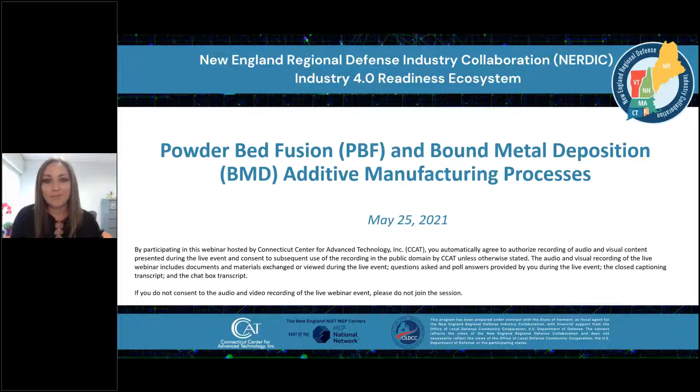So today we have a really great featured speaker, which culminates our four-part series focused on additive manufacturing. Today I'll go through our agenda, which you see here. We started with generative design for additive a few weeks ago, and here we are today to talk about Powderbed Fusion and Bound Metal Deposition from the team at the Center for Additive Metals, University of Maine, their leadership there, as well as the Vermont Manufacturing Collaborative at Vermont Technical College. Excited to also have a graduate student, a part of that technical team from the University of Maine, to present.

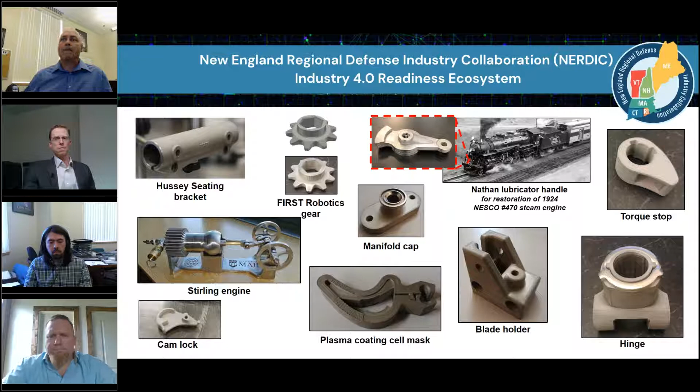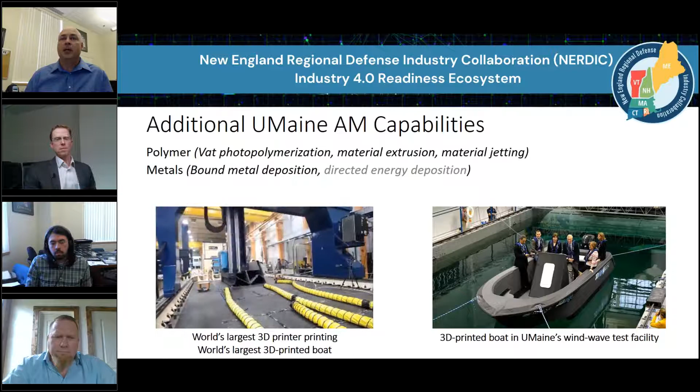Ben? Yeah, then I'll turn it over to Christopher Paulk from the Vermont Technical College, and he'll tell you a little bit about what they're up to in their process.

Thanks, John, appreciate it. Good afternoon everybody, my name is Christopher Paulk, I'm with the Vermont Manufacturing Collaborative. I'm currently serving as the executive director interim for Vermont Technical College, overseeing this project.

The Vermont Manufacturing Collaborative was a joint project between higher education, the DoD - the Department of Defense, the Vermont MEP which is VMEC, local industry partnerships, and our economic development offices. The idea behind it was to stand up an advanced manufacturing center focused at the Randolph Center campus, with an additive focus that would bring in post-processing technologies and essentially try to build bridges across the industrial skills gaps the DoD is seeing within their supply chains.

We'll have an initial focus on additive manufacturing, and we'll basically put in place all kinds of post-processing technologies to support that kind of technology. The goals from this entire program are really to engage students in 3D printing platforms and all the skill sets that support that, from CNC machining, CAD/CAM, QA, QC, metrology - you guys can kind of read that there.

Also looking at developing and enhancing industry partnerships, internships, and continuing education programs and opportunities that we can have, as well as trying to become a hub, if you will, within the New England region for all of our partnerships within universities, colleges, and industry, where they can utilize the facilities, curriculum, and expertise to really try to provide multiple pathways back to manufacturing.

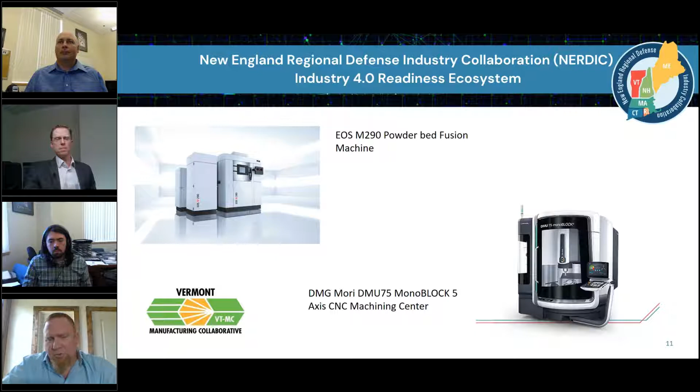Some of the equipment going into this place, we've already purchased an EOS M290 Powder Bed Fusion machine, which is going to be our big guy, as well as a DMU 75 monoblock. This is a DMG Mori unit, a 5-axis CNC machining center. I call this my Ferrari. It's a big, beautiful 5-axis machining center that will do all the post-processing for us as well.

Next thing we've looked at, we've also purchased a smaller EOS M100 machine to get a little more throughput with it, as far as training students and stuff like that, as well as we're doing CT scanning. We've got all kinds of binder jet stuff we're looking at as well, a whole assortment of smaller polymer machines, and a lot of metrology equipment and microscopes going into this place.

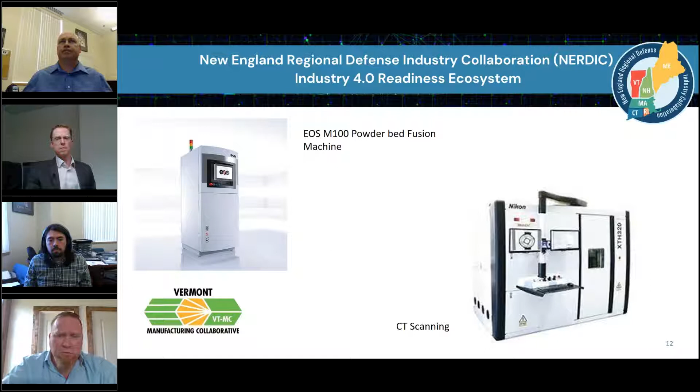So we'll basically have a complete additive center, really accessible for the entire region to utilize, especially with this partnership with NERDIC and CCAT and everybody else. It'll be a great opportunity for everybody, a great platform to start training people on and to use for any kind of technology development you'd like to have. Thank you for letting us have a moment to show you what we're doing in Vermont. And with that, I'll turn it over to Brett.

Thank you, Chris. Next I want to talk about the value drivers and market size for additive manufacturing. Hopefully this is a review for many of us, but just to see where we are.

Some of the classic case examples include the GE LEAP engine. This particular engine is quite exciting. The fuel nozzle, in which they took 20 parts and reduced it down to 1, and they were able to extend the life due to the ability to add conformal cooling.

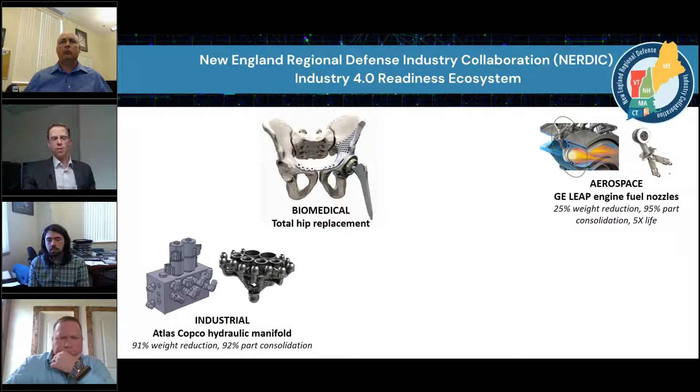More examples include biomedical examples. There are industrial examples of additive manufacturing of metals. In this case, a 91% weight reduction at the end of a robotic arm, thus leading to faster cycle times. Quite exciting example, non-metal, but in footwear. Can you tailor footwear to the application, such as a second baseman requires a far different kind of response on their feet than a pitcher might require.

There's a very famous example of the nacelle hinges for the Airbus A320, in which we go from a kind of welded type example in the back left, and towards the front right, we get to topology optimized additive manufacturing type of shapes.

An exciting example of additive metal is when we start looking at conformal cooling and the placement of cooling paths within the circuit. So here we have the exterior of the part, and the blue lines in the right image represent the cooling path. These cooling paths are feasible because of additive, and you're able to place the cooling path wherever it's most needed.

As a last example, we can see mass customization. It's another advantage of additive. In this case, BMW, it's a BMW i8 Roadster part. BMW has built more than 1 million additive parts between 2010 and 2019.

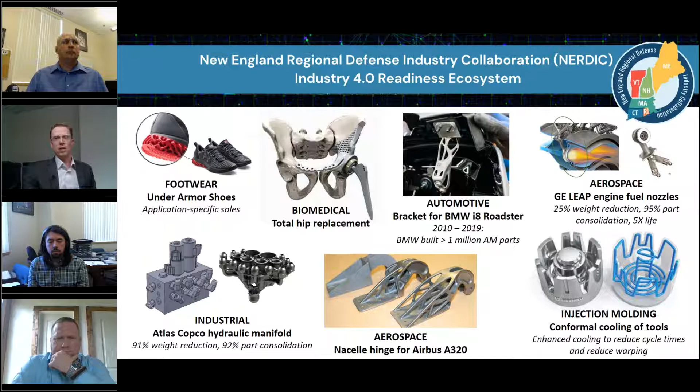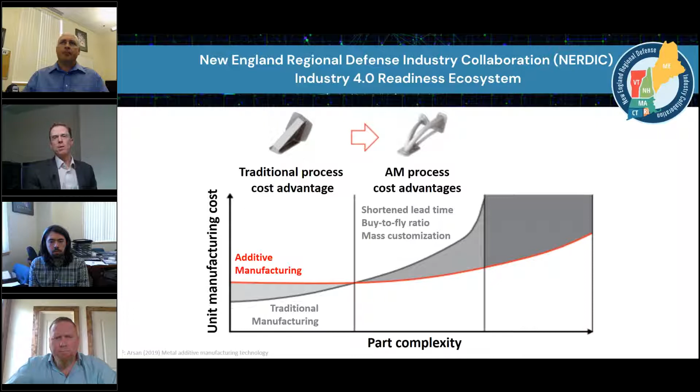If we start considering the process cost advantages of additive manufacturing, we get shortened lead times, being able to go from maybe 12 weeks to get custom jigs and tooling ordered to maybe a week or two. We also get to what's known as the buy to fly ratio, in that many times in aerospace you might buy a 100-kilogram billet and you're machining that down to maybe 5 or 10 kilograms, so a huge portion of the mass is removed from the billet. That's the buy to fly ratio.

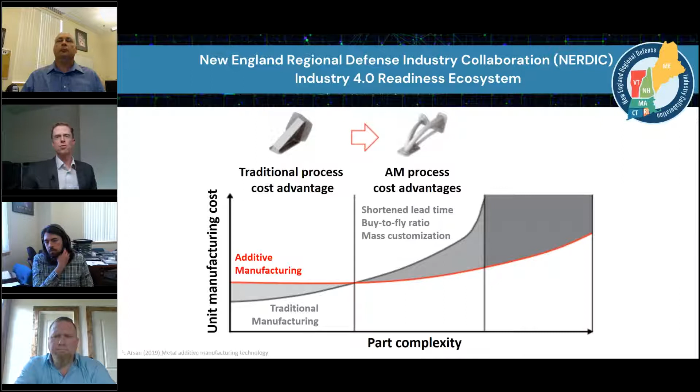And we also see the mass customization that was in the BMW example, or that we also find inside of biomedical applications. And lastly, when we look at some real value opportunities for additive, we get to the design advantages.

In these we have things like part consolidation, that's with the GE LEAP engine, where we take from 20 parts down to 1 part for a 95% part consolidation. You have lightweighting; there are examples where brake rotor calipers are being built, and if we can reduce the amount of weight in cars, particularly race cars, or aerospace, it becomes very valuable.

And we also have these enhanced functionality, particularly conformal cooling is one of them, and another emerging application are heat transfer media for aerospace applications, places where we can enhance the heat transfer and reduce the weight. All of these become extremely attractive kind of applications for additive manufacturing, particularly of metals.

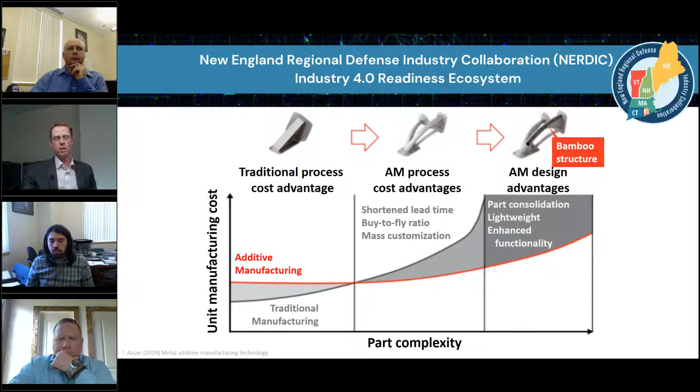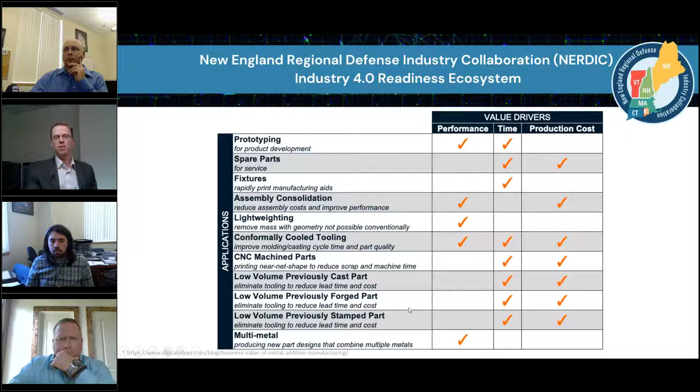Here's a snapshot of some value drivers by application. With prototypes, we see performance and time advantages, and these kind of range. Clearly down here we have conformal cooling, where we get a performance improvement and a reduction in lead time, but also we can get these into some sort of production process. And there are some additive manufacturing of metal applications down here at the bottom where you can get to multi-metal, like functionally graded metals, things that are just very difficult or impossible through traditional manufacturing processes.

All of these advantages have led to a huge growth in additive manufacturing. In 2019, the additive manufacturing market was valued at $11.9 billion and growing at 21% per year, serving markets in aerospace, defense, automotive, biomedical, dental, footwear. In particular, dental has really adopted additive manufacturing, and you see this tremendous growth since about 2009. This tremendous growth is projected to continue for years to come, and we're seeing value growth with additive versus traditional manufacturing methods.

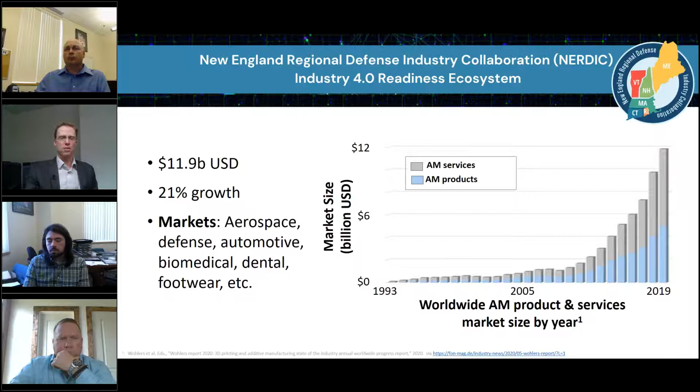So because of that, let's first take a look at what might be some of these additive manufacturing processes.

In general, there are 7 types of additive manufacturing, and then there's an 8th type known as other hybrid. Probably most people, if you have a residential type of a polymer extruder, as discussed in the poll question, you're very familiar with this material extrusion in the top left. Essentially, you heat up a solid, it goes through some sort of phase change, it liquefies, and then it resolidifies into some sort of solid object.

We also have material jetting, in which you have a photosensitive polymer which is laid down, and here you have a UV light which passes over the polymer, cures it, and forms a solid. There's binder jetting, in which you have a print media in a bed, typically a powdered metal or powdered ceramic kind of material, and then you lay down a binder which binds these together. Sometimes there's post-processing, which we'll see in some of the later slides.

There's vat photopolymerization, in which you have a liquid photosensitive polymer, and then you pass a UV light over it. There's powderbed fusion, in which you have a bed of powdered metal, and then you pass some sort of heat source over it, typically electromagnetic radiation, which causes the powder to liquefy and then resolidify into a solid.

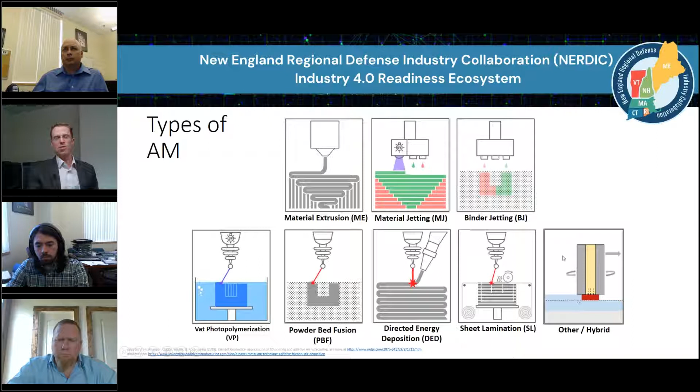The next one is directed energy deposition, in which you have powder being fed down, and then the electrical or electromagnetic energy strikes the powder either mid-flight or right as it's placed, so it liquefies mid-flight and becomes a solid upon solidifying at the surface. We can have sheet lamination, and then the last category is other hybrid, which we won't go too deeply into today, but it's quite an exciting field with friction stir welding and some other applications.

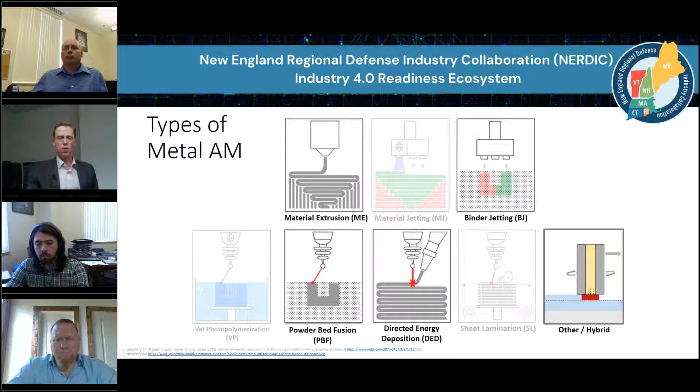If we look closer and focus our search into types of metal additive manufacturing, we have subcategories here. So clearly the ones that are UV sensitive photopolymers go away, they're grayed out, and sheet lamination goes away. So we're left with material extrusion, binder jetting, powderbed fusion, directed energy deposition, and these other types. Now we're going to pass through each one of these, at least the first four, and summarize what the technologies are.

With material extrusion, the basic process as shown in the video is we first extrude out typically a binary composite of the metal and a binder, and you also see some white here for interface that goes in between there. You'll then take the part out of the printer. It goes into some sort of debinding solution, typically an organic solvent.

That process typically takes 48 hours or so. Obviously, this video is a little bit of a time lapse. Then it goes into a sintering process, which elevates the temperature to somewhere around, well, it depends upon the material, but probably around 1350 to 1400 degrees C. And we have solid metal parts that come out. So essentially, it's a three-step process consisting of extrusion, debinding, and sintering.

Commercial equipment in this space includes the Desktop Metal Studio Plus system and the Studio 2 system. At University of Maine, we have the Studio Plus system, and it's being converted to a Studio 2 right now. Markforged is also in this space with the Metal X.

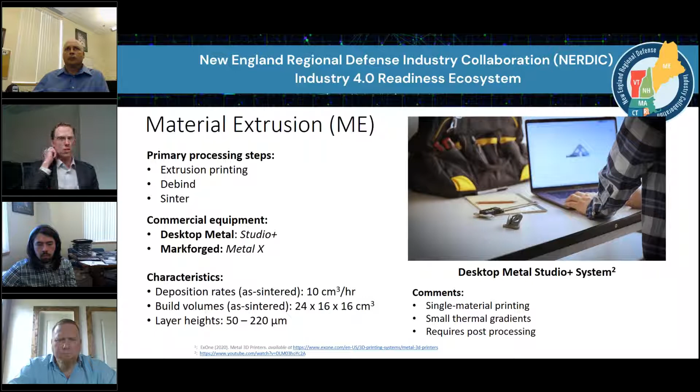Characteristics: typically these types of machines will deposit around 10 cubic centimeters per hour. Layer heights are about 50 to 220 micrometers. You're printing a single material, and you require some sort of post-processing. We also end up with small thermal gradients, meaning the fusion process is typically at a small thermal gradient, so the object is mostly at the same temperature.

For those that have never seen sintering before, here's an SEM image. These two particles will sinter together. Let me back it up a bit. Here's a particle, there's a particle. It's a solid state process, and you typically raise the temperature just below the melting temperature, and the particles will fuse together.

The driving force is a minimization of free surface energy, and it's important that it's a low thermal gradient process, so that you don't end up with a lot of thermal distortions, or at least less so.

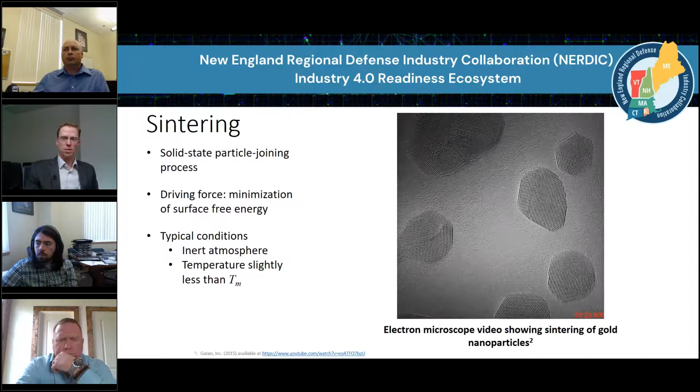Our next type of process that we're going to look at is binder jetting. In binder jetting, we have a debinding and binding process where you have a powder bed. The powder bed has a binder laid on top, which will then bind the powder together. It then goes through a debinding and a sintering process after that. Let's see what this looks like.

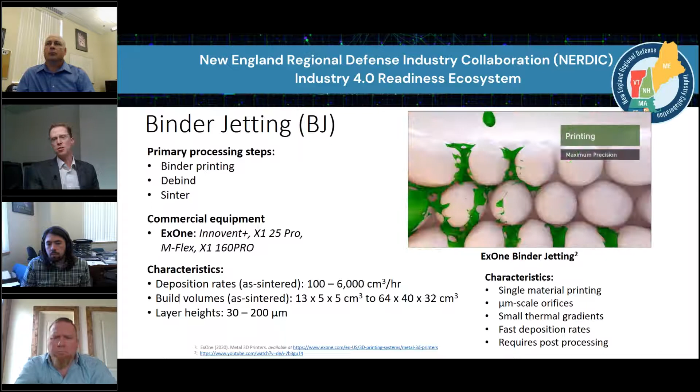After those are laid down, a print head will go over and spray down the binding agent, which will then solidify, or at least temporarily solidify, the particles together. This takes the particles and attaches them together until the point that we can pass through a debinding agent and sintering, which actually forms the solid, going to that same sintering mechanism we saw previously.

Commercial equipment in the space: particularly ExOne is quite dominant here, with the Innovent+, the X1 25 Pro, M-Flex, and the X1 160 Pro.

Importantly, you see very high deposition rates. If you recall, extrusion is about 10 cubic centimeters per hour. Here it's 100 up to 6,000 cubic centimeters an hour, and you can get much larger build volumes. Layer heights are typically 30 to 200 microns, similar to material extrusion.

And we end up with single material printing. You must have a hole or some opening in any solid shell to allow particles to pass out of your object. Otherwise, if you bind the outside but have a bunch of powder on the inside, you'll end up just fusing those together during the sintering process.

But we can get to very high deposition rates, and so you start rivaling some of the other processes. It addresses one of the primary concerns of additive manufacturing, which is the slow nature of the process.

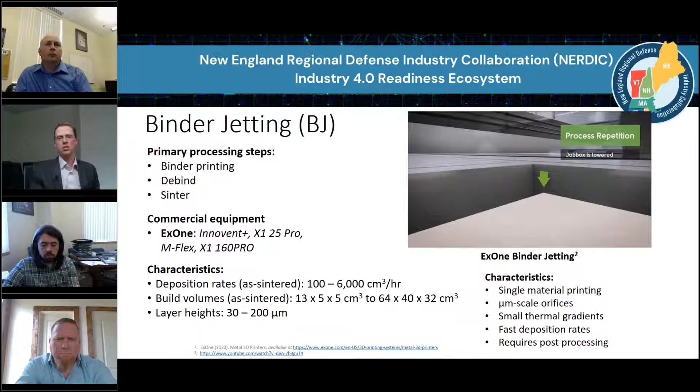The next process we're going to look at is powder bed fusion. In powder bed fusion, you have a powder bed, as you would imagine. Here comes the recoater passing over, and then some sort of electromagnetic source liquefies the powder, which then cools and solidifies to become a solid.

Here that process is sped up, and now we'll see a schematic of this, obviously at a much faster rate than what you typically find. So you have the part, and here's how fast each layer takes. Each layer is about 30 to 100 microns.

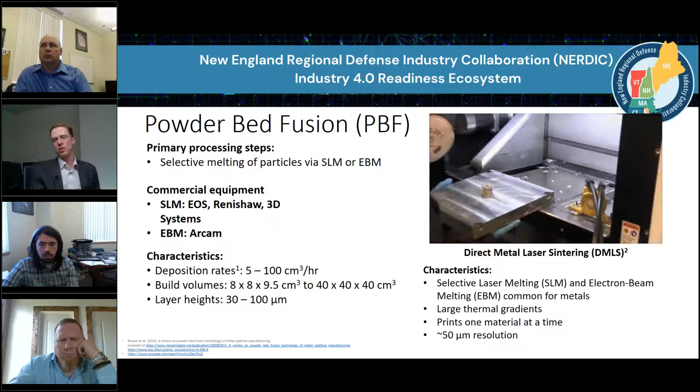So here the part is being removed from the powder bed, at which point you can do any sort of post-processing. Here they're taking off the thermal boundary to allow heat to escape, any sort of cleaning the finish, and post-processing.

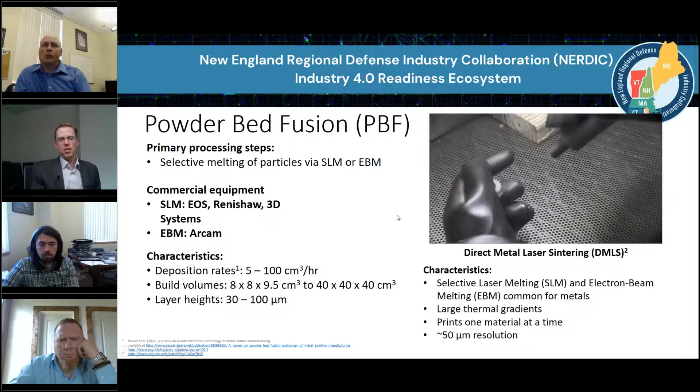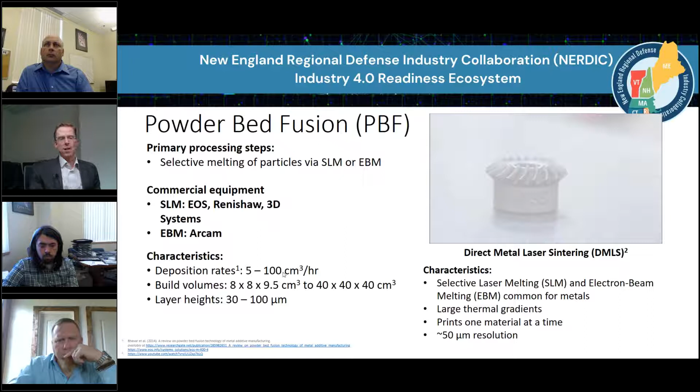One important thing with this process is that you get large thermal gradients. As you have a solid at the lower levels, you place a powder, and then it liquefies and then solidifies on top as it cools. That leads to very large thermal gradients, which can lead to residual stresses and texturing.

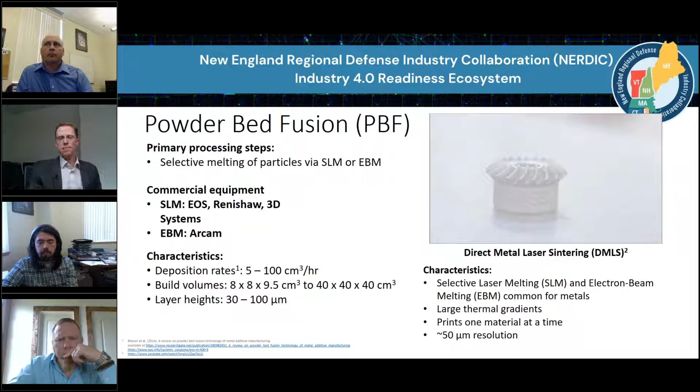The other thing you need to consider with powder bed fusion is that you typically need an inert environment. Powder has a lot of surface to area ratio, or surface to volume ratio, and it can be reactive in nature and lead to explosions. Typically, you have to do powder bed fusion in some sort of inert environment that takes place within the machine itself.

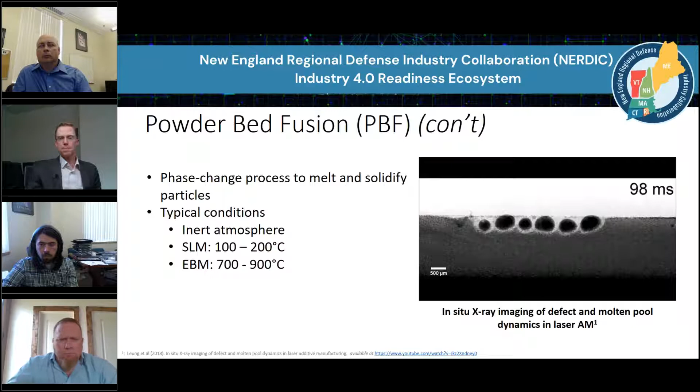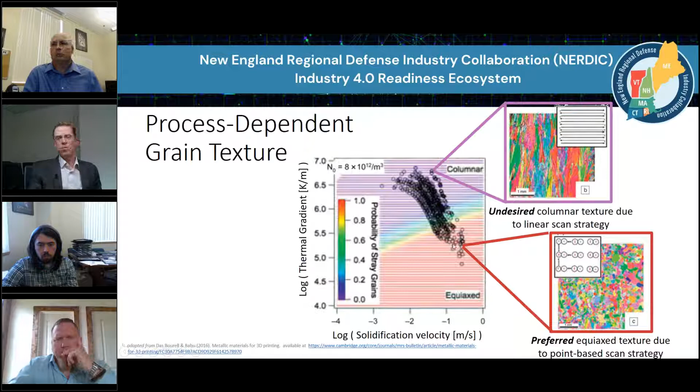Up here in the purple region, what we end up with is that this high thermal gradient, slow solidification velocity, you get what's known as columnar grains. Here is an image of these grains. You can see each color represents a different grain, and you get these very long, slender columns. Down in the red region, which is the equiaxed region, you get this more preferred grain texture in which they're almost more circular in shape.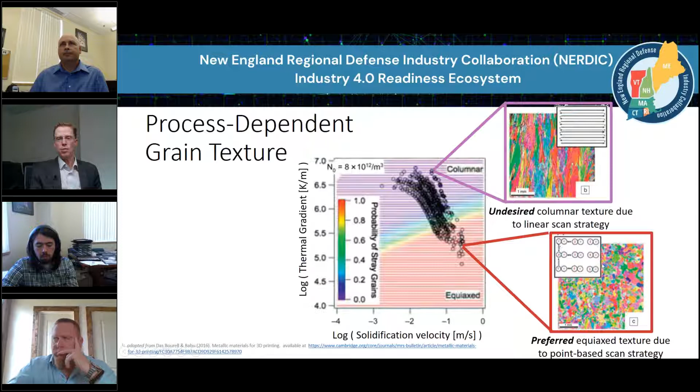The key important thing here is that the process can control how these textures are formed, and columnar grains can struggle in higher order mechanical effects like fatigue. So if you're making aerospace aircraft structures, you probably want to avoid these columnar grains up here, and you want to be more focused on trying to produce these equiax grains on the lower right.

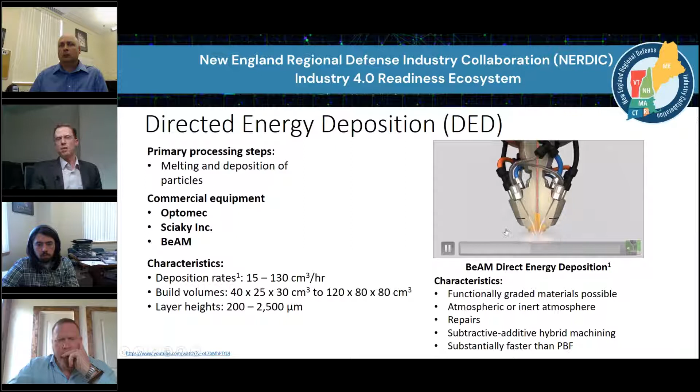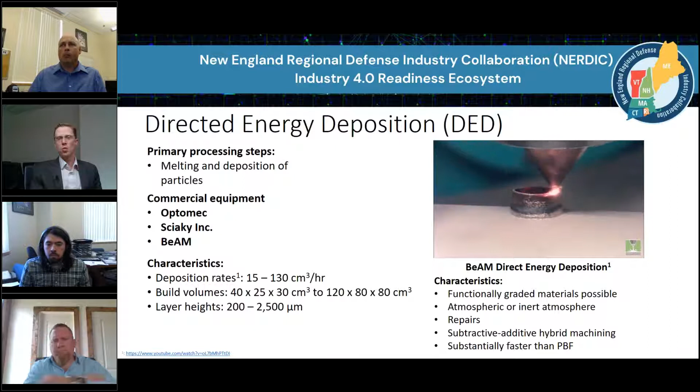The last process we'll look at is directed energy deposition. What you'll see is there's powder coming down right through here. When the powder gets to the bottom, there'll be a light that comes down, strikes the powder almost mid-flight, and it will heat the powder as it's traveling and liquefy it mid-flight. The liquid will then land on the solid surface and cool, thus forming a solid. So it's almost a little bit like really fine welding.

Players in this space include Optomec, Sciaky, and BeAM. You generally get some fairly large deposition rates, about 15 to 130 cubic centimeters per hour. Build volumes can be quite large. Some of these can actually be outside of machines where you don't have a controlled environment, thus allowing you to do repair type activities, which is quite exciting.

Another cool and exciting part of directed energy deposition is that we can get to functionally graded materials, meaning that we can transition from, let's say, iron to something else if you need to change the type of material along the way. These can be done in atmospheric or inert atmosphere environments.

They're exciting because we can use these types of technologies for repairs. You also get to this subtractive-additive hybrid machining. Many times if you start off with a blank that's pretty large, add a little bit, then do some cleanup with subtractive, it offers an even more efficient use of additive and subtractive manufacturing. The last thing is it's substantially faster than powder bed fusion.

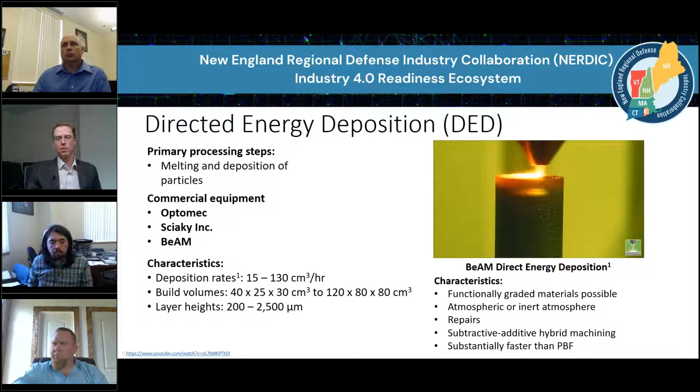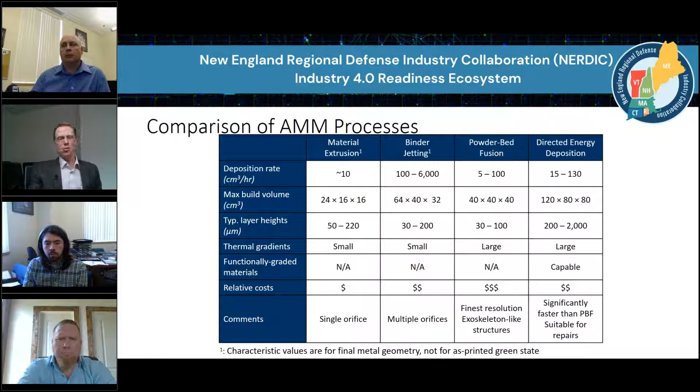So let's take a deeper dive look at bound metal deposition. This is the type of system that we have been running at the University of Maine for a little over 2 years now.

Bound metal deposition includes 6 steps. We start off with digital design of the part, then slicing, then we print the part, then a debinding process through an organic solvent, sintering in which the metal is fused together, and then any post-processing that needs to take place.

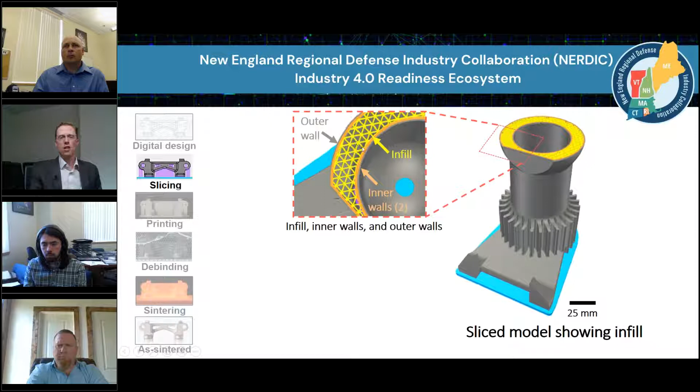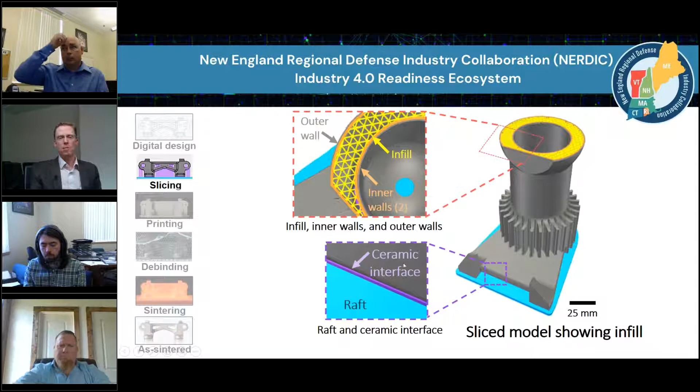At the bottom, these parts are built upon a raft—shown here in the slicing as blue. There's a ceramic interface that separates the raft from the desired part for the sintering process; otherwise the raft would sinter to the desired part. This shows the ceramic interface as purple, between the outer wall of the part in gray and the ceramic interface in purple.

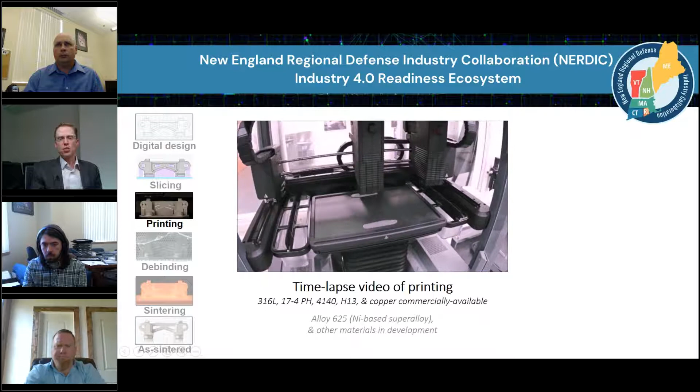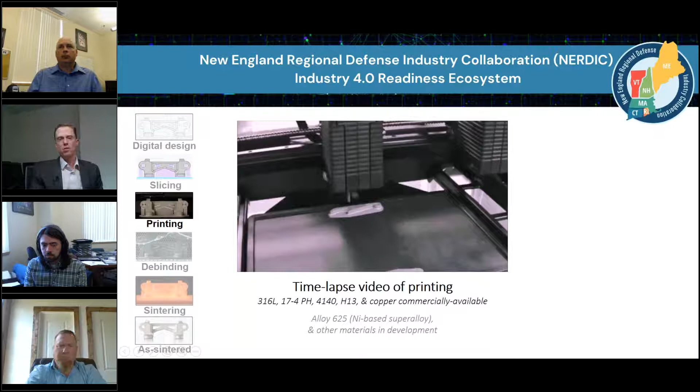If we look at printing, you'll recognize this if you have a residential scale polymer machine—it's a very similar process. You start off with a rod of material from the manufacturer, and it goes through almost what you'd imagine as a hot glue gun. It's heated and forced through an extrusion nozzle, in this case a 400 micron nozzle, and through the G-code it prints the part. Today these materials can include 316L, 17-4 PH, 4140, H13, and copper—all commercially available. There's also a nickel-based superalloy being developed, as well as other materials in development.

If we look at that extruded filament through an SEM, this is the entire extruded filament, roughly 400 microns across in diameter. The black regions represent the binder, and the white regions are the metal powder. We can see this metal powder is mostly spherical, and it's on the exterior—but it's also all the way through. It's just that with the SEM, you don't see the interior of the extruded filament.

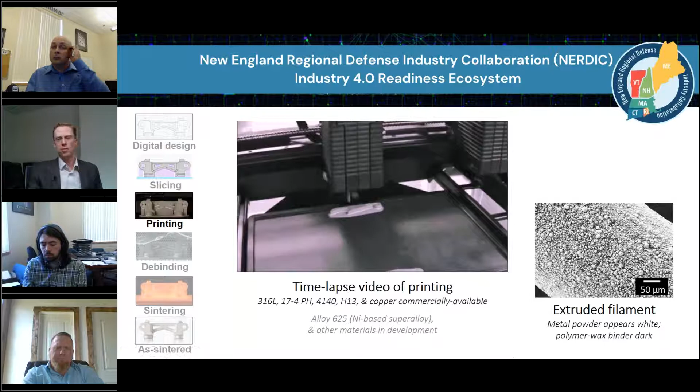Once the part is printed, it then goes to an initial debinding process, typically an organic solvent. This debinding process depends on how thick the sidewalls are. So for something that has three wall layers, maybe an outer wall and two inner walls, it's going to take less time than something that has maybe 6 walls or 10 walls.

There are maximum thicknesses that we can run the walls, but the debinding time just depends upon how thick those walls are, and you can batch these jobs together. So you typically print 3, 4, 5 parts, put them in the debinder, and run them as a batch for 30 to 40 hours.

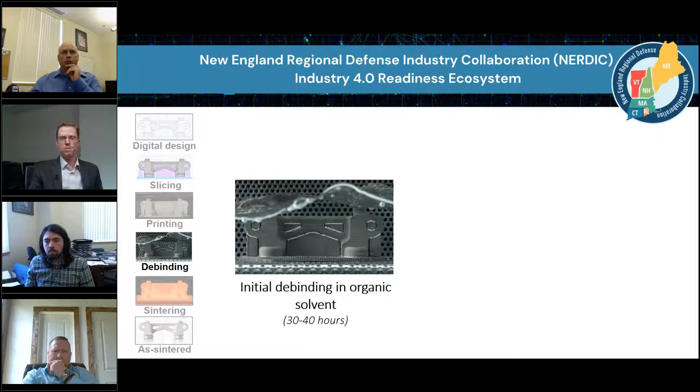If we look at a part after it's been debound, everywhere where there's black, that's the polymer we're seeing, and all these white spheres are the metal powder. You see there's quite a range in powder size, some relatively large like up here, and lots of relatively small powder sizes.

This powder size is different than what you'll find in powderbed fusion. One reason material extrusion is substantially less expensive than powderbed fusion is that with powderbed fusion you have to have very consistent size particles, to make sure you don't get vaporization, ablation, or any other deleterious process as heat goes into each particle. But here, because the thermal gradients are low, you can use more of a developed powder stream.

Typically for metal injection molding is where that powder is coming from, a very similar process. We also see some sort of fibrous structure here that kind of holds it together.

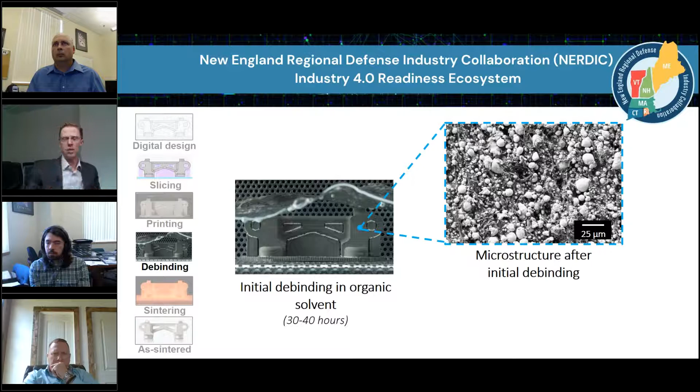So in this state, they're fairly fragile. You don't want to be shipping the parts around. Typically you want to hold them at one facility. You can hold them, but if you squeeze them or press with your fingernail, you'll actually damage the part just from that pressing. So they are somewhat fragile at this point.

After they come out of the debinder, they go into a sintering step. So here is an SEM. After you heat up to about 150 to 200 degrees C, depending upon the binder, the binder will evaporate and you're left with just metal particles. So here's the metal particles right here.

As we continue to heat up to around 1350 or so, the sintering process will take place. So here we have those particles and they'll fuse together in solid state sintering. Whenever it's done, what we end up with is a microstructure on the far right, which we'll look at more in the next slide.

So a couple of characteristics: we have a max sintering temperature of somewhere around 1350 to 1390 degrees C for a 17-4 PH, so right below the melting point. The sintering gas is an inert environment, argon with a little bit of hydrogen to remove any oxygen on our particles. It's at 100 torr pressure.

Typically it takes about 36 to 48 hours, and you do get some relatively large shrinkage, as you might imagine. So here we start off with powder, and you see there's lots of voids in this powder, and it's going to sinter down to right here, so you get shrinkage in the neighborhood of about 18 to 20%, and it's a little bit directionally dependent also.

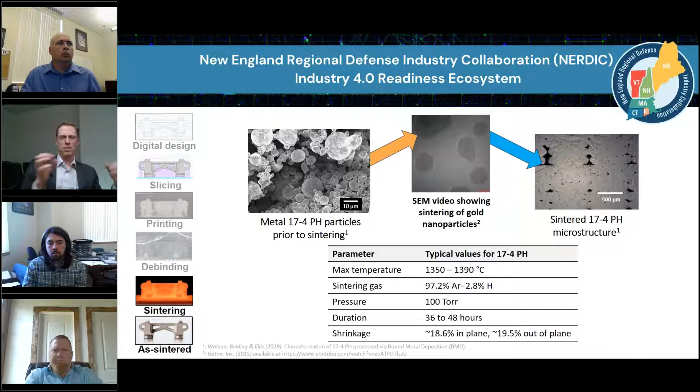That shrinkage is handled within the software, so all we have to do is provide the final shape we want, and the software is smart enough to apply the shrinkages as needed.

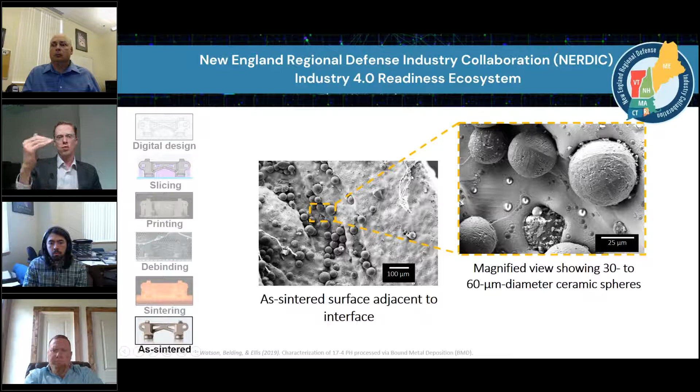If we look at the as-sintered part right at the interface, this is where we have the ceramic interface that separates the raft from the as-designed part. We can see there's these little ceramic spheres, and these spheres are what prevent the raft from sintering together or fusing together with the part. Kind of interesting.

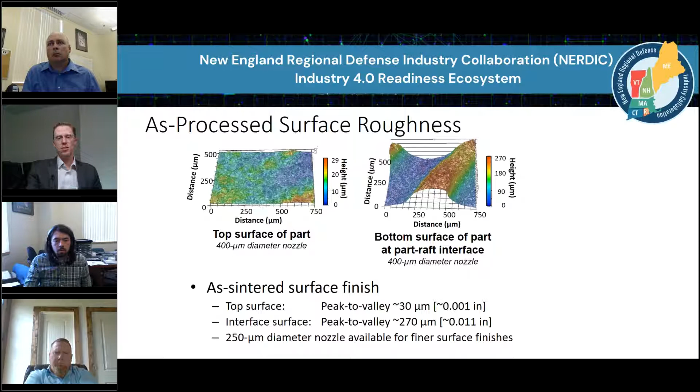There's since been an update to the software where it's not quite as rough as shown here. On the top surface, we have roughly 30 microns from peak to valley. On the bottom surface, it was about 270 microns. If I had to guess today, it's probably maybe 170 microns from peak to valley. There's also a finer diameter nozzle, 250 microns, that can get a smoother surface finish if desired.

You can also do post-processing, some treatment in either the as-printed or as-debound state, and do some cleanup on the surfaces.

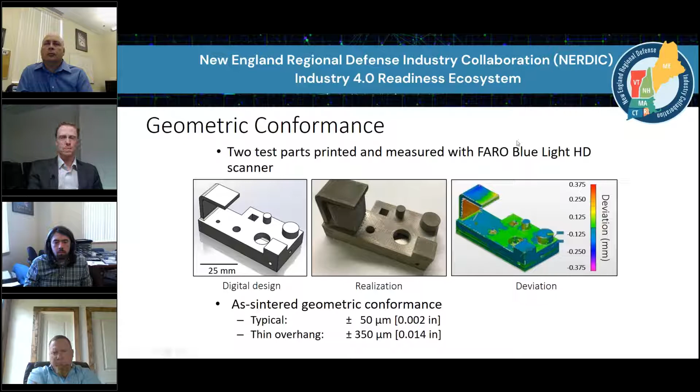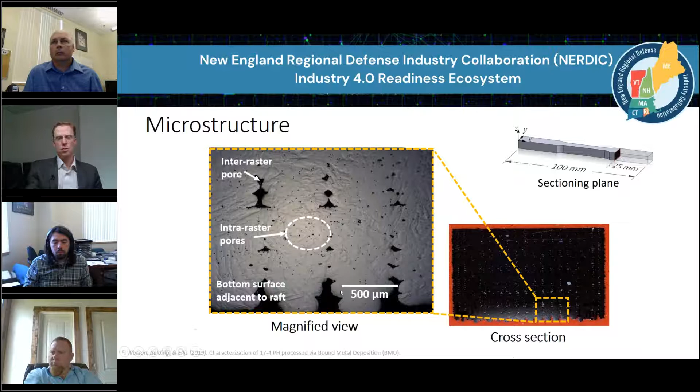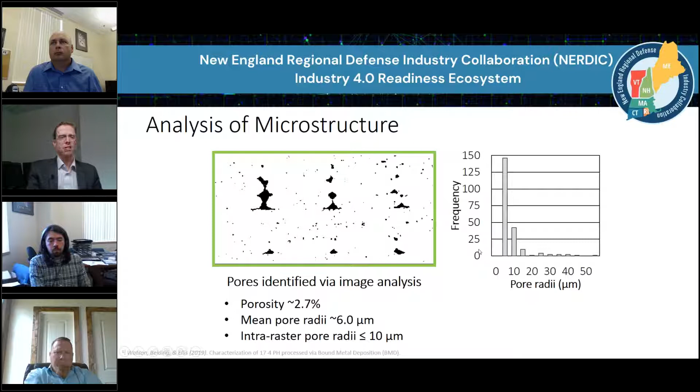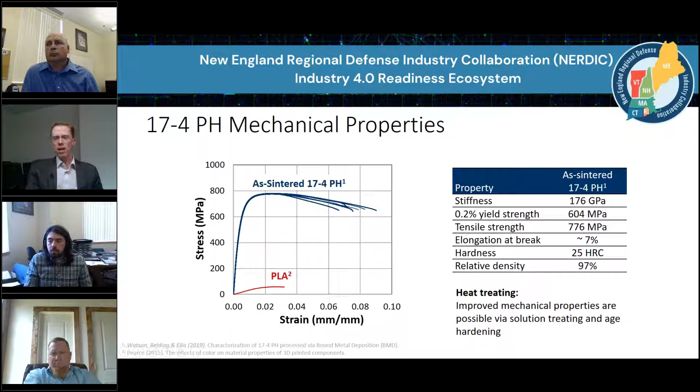As mechanical engineers, we're probably more used to these mechanical properties. Here we have stress-strain curves for the as-sintered 17-4 PH, and for reference down here is PLA. We end up with stiffnesses, yield strengths, and tensile strengths as shown on the right. Probably even more important is this next slide, where we start comparing what we get with bound metal deposition versus what you see with wrought or as-sintered metal injection molding for similar materials.

We get a modulus of elasticity of about 180 GPa, a little less than what you'd find in a wrought material. Yield strength of 600, once again a little less, and a tensile strength of about 775-800, which is also a little less. Elongation is a little less. Hardness is, once again, a little less, and there's a bit of porosity there.

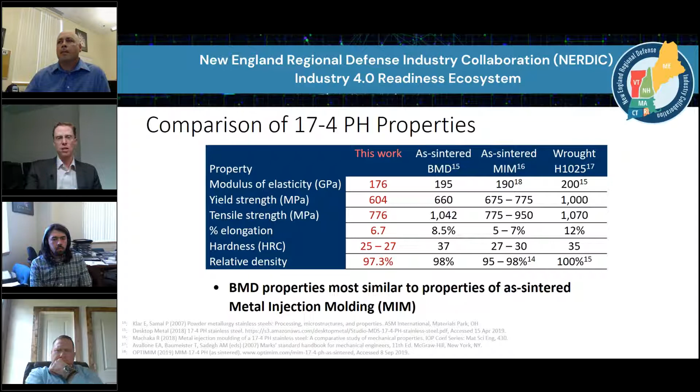So it's certainly comparable, and certainly allows you to do new things with additive manufacturing of metals that you'd hope to do. It doesn't quite get you all the way to wrought properties. However, I'll also comment that with wrought material, you have some wasted material—portions of the geometry that aren't very utilized, almost like lazy material. Because of that, there's a higher utilization of the material that is placed, although there's a small derating of the mechanical properties as you go through and look at them.

So what I want to do now is turn it over to John, who's going to speak to additive manufacturing of metals case studies. So John. Great, thanks, Brett. Thanks for all the info.

This is a unique one. This is not a case study that we did ourselves. This was one that was done at GE in collaboration with GrabCAD. They threw it out to the world to say, okay, who can basically generative design a better bracket than what we did subtractively. In 2013 they were able to take over 3.3 pounds of material out of this bracket, which equates to over $200,000 to $300,000 per year per carrier, and up to $9.5 million for all commercial aircraft.

So one small change on a piece of aircraft is a huge benefit to the industry. Looking at the design, they basically threw it out and said, okay, what's the challenge? We had over 700 entries from about 320 different designers.

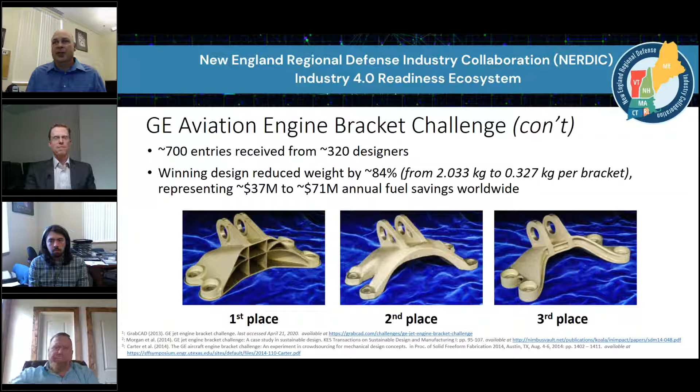So pretty unique way to do it. It allowed it to take place all over the world, not just one locality. I think they said they had basically over 700 person hours of design work that went into it. So go ahead to the next step.

Their supplier said, well, unfortunately, COVID's going on, and it's going to be 3 to 4 months before we can get that gear to you. So they came to us and said, hey, is there any way we can recreate this and get us back up and running? And we said, well, we'll give it a shot.

Luckily, this is a very low RPM process, not a high-speed gearbox. It basically does an oscillation. There's a servo motor that drives it forward and backwards, with no shock loading really in it at all. It doesn't move that many RPMs per day, so it's a decent application for this.

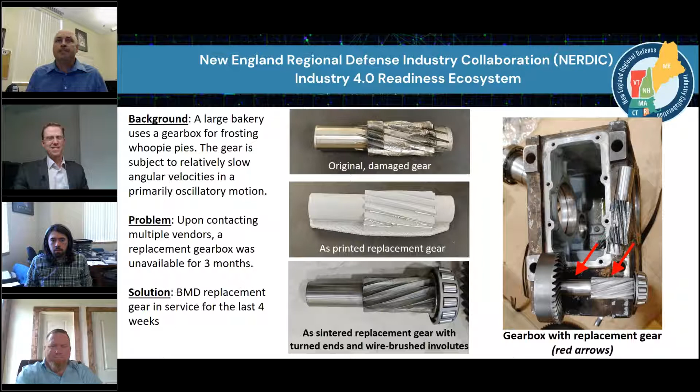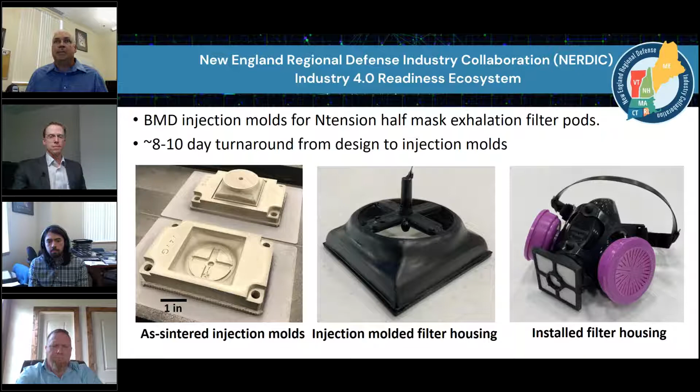As I said before, we have a lot of students directly working on these projects within our center, both undergraduate and graduate. With that, I'll turn it over to Alex, our graduate student here at the University of Maine within CAM, who can talk more about some of the student-based projects we're working on.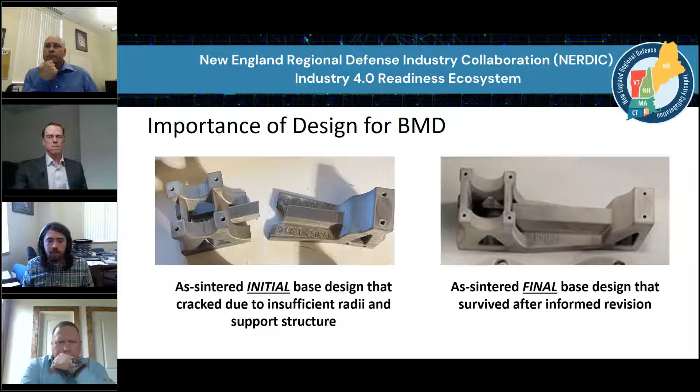One thing to highlight here is that there was no need for additional tooling to produce this new part. All it took was some tweaks in the CAD design, then printing it using the exact same process as the first one—very quick, very easy iterative design with additive manufacturing.

And here is a video showing that engine actually working once it was fully assembled. The majority of these parts were bound metal deposition, but some of the parts were just extra hardware, and some cylinders that were taken from a Stirling engine kit. But yeah, it worked pretty well.

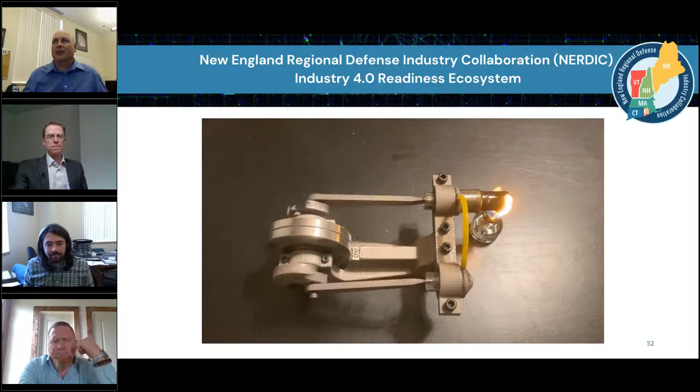Okay. Now back to John.

Great, thank you to the team for your very informative and in-depth overview of the various capabilities, going into more technical depth for some additive. As an electron microscopist myself, I was taken aback by some of the data, and one of my questions I had dropped in the chat—I'd invite Jeff Crandall, my colleague from our CCAT Advanced Technology Center, if he wants to pop in as our additive guru, but perhaps many of you will be able to handle questions. When I was doing additive manufacturing in powder bed and directed energy systems, we were finding those columnar grains. So I was enlightened today by learning about this point-based method to really achieve more equiaxed grains. Dr. Ellis, I don't know if this should be directed to you, but I'm wondering how much more time it is if you're dwelling the beam or the source on your metal versus if you were just to use a scanning approach. I'd love to hear that answer if any of you could enlighten me.

Yeah, so that work came out of Oak Ridge National Labs, one of our collaborators out of the 34 industrial collaborators there. They developed that—it's called the Dehoff fill—and it has very similar characteristics to what you find in casting. Anytime you cast, you have columnar grains on the outside down to equiaxed in the middle, and a similar type of behavior happens in additive. There's some really nice work out of Oak Ridge where they actually use powder bed fusion as a typewriter, and you can type words by the grain texture—they'll put the letters in equiaxed and the surrounding letters in columnar. It's very cool. Fascinating. Yeah, a lot of fun stuff.

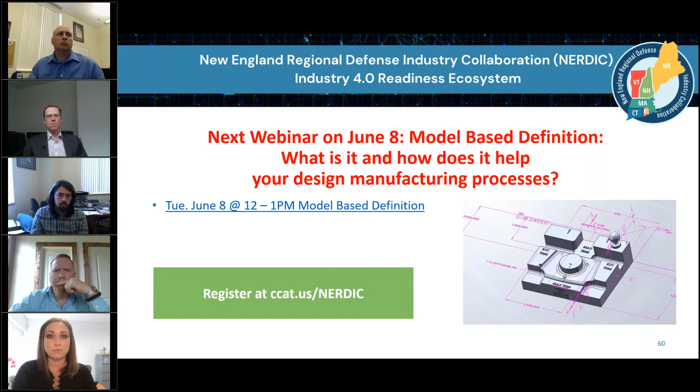With that being said, I think we have maybe one more slide to pivot to, and that would be our next webinar, which will be following the Memorial Day weekend. On June 8th, we'll start diving into model-based definition. That will complete our series when we talk about how we really create a 3-dimensional blueprint, if you would say, with all of that technical data to help foster the ease of use for building a part, whether it's additive or hybrid.

We'll be closing in on the remainder of our workshops, and that would be on-machine probing, following MBD, and then we get into our technology demos. These will be showcased in real time with real supply chain companies across the NERDIC ecosystem. We encourage you to visit the NERDIC website, ccat.us/NERDIC, to learn more.